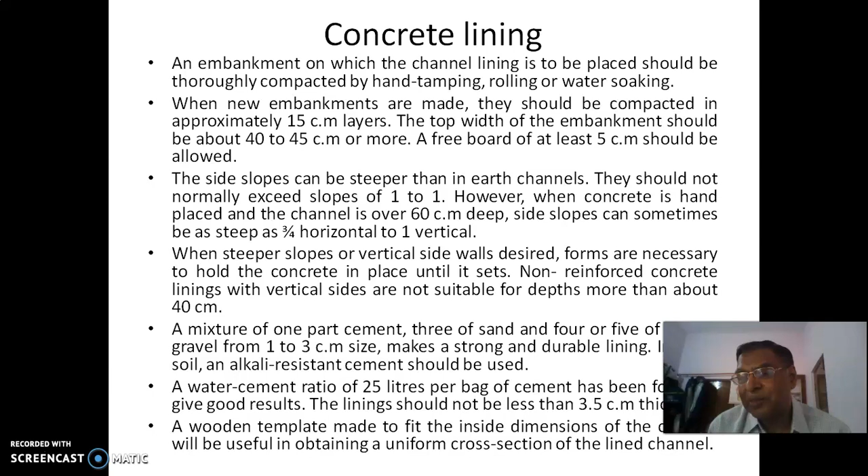Okay, next. These are very important: transverse contraction joints. Like in concrete, you leave some gaps. Normally for roofs, when you have a larger area, you leave some gaps to allow the concrete to expand and contract. Even concrete roads have grooves; there are gaps. So like that, in your field channels, transverse contraction joints are used in concrete channel linings to control transverse cracking.

Cracking results from shrinkage during volume changes caused by changes in temperature or moisture content. This concrete, particularly reinforced concrete, gets expanded and contracted. When it is wetted and when it is not wetted, the concrete expands and contracts. So to give this gap, you need joints. These are called transverse contraction joints. The spacing between transverse contraction joints to reasonably control cracking should be 2 to 3 meters.

So that means every 2 to 3 meters we might have one transverse contraction joint. That's why the lining is laid in lengths of 2 to 3 meters. If you are having precast concrete structures also, you can put them in these lengths. Contraction joints are formed by constructing a vertical groove in the top third of the concrete.

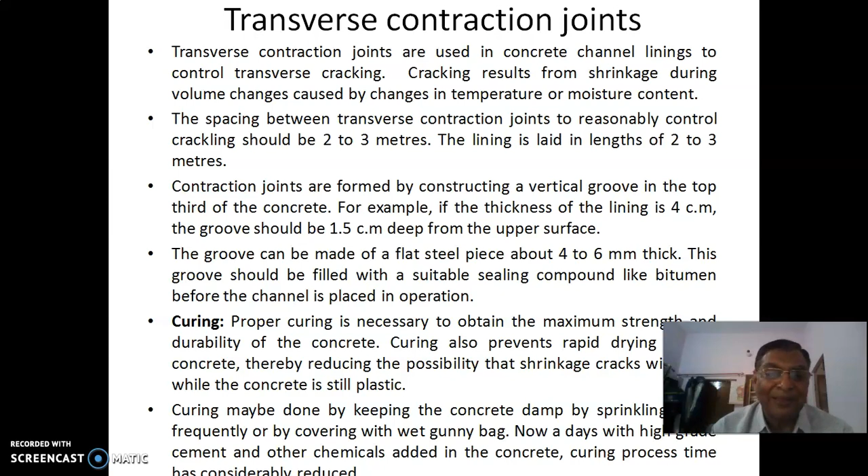Curing, this is a very important activity. Proper curing is necessary to obtain the maximum strength and durability of the concrete. Curing also prevents rapid drying of the concrete, thereby reducing the possibility that shrinkage cracks will occur while the concrete is still plastic. So if you do not have curing, you have some problems, okay. So curing prevents rapid drying of the concrete. It should slowly dry, thereby reducing the possibility of shrinkage cracks.

Curing may be done by keeping the concrete damp, by sprinkling water frequently, or by covering with wet gunny bags. So you will spread the gunny bags, and then quite often in a day, 2 or 3 times, water may be sprayed on these gunny bags. That will take care of it.

Nowadays, of course, with the high grade cements, and it seems there are some chemicals also added in the concrete, the curing process time is considerably reduced. This is one method again. Curing process time also can be considerably reduced.

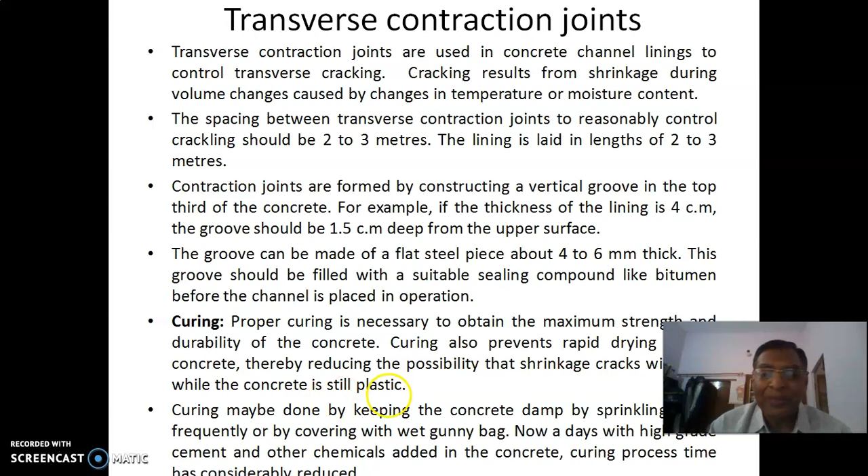Brick or stone masonry lining. Single layer brick or tile or rubble stone may be used to obtain satisfactory lining of field irrigation channels. Apart from concrete lining, as we said earlier, brick or stone masonry lining also can be done. How is it done? Single layer brick or tile or rubble stone, whatever, they are arranged, and they are simply cemented with some kind of mortar, right?

The bricks, tiles or stones are laid flat on the compacted side. Once the earthen channel is compacted, both the sides and bottom, the joints are filled with cement mortar. When you have arranged the compacted soil, over which you are placing this stone or tile or brick, you arrange it closely, and then cement it with mortar. So that is the procedure.

Whatever mortar you are preparing, you should have a cement sand ratio of 1:4. That means 1 part of cement and 4 parts of sand. The choice between brick, flat clay tile or stones depends mainly on the availability and relative costs. So suppose local stone is available, you can normally go for stone lining. If no stone is available, you can go for brick lining. Or tiles, if manufactured tiles are readily available and cheap, then you can also use them, no problem.

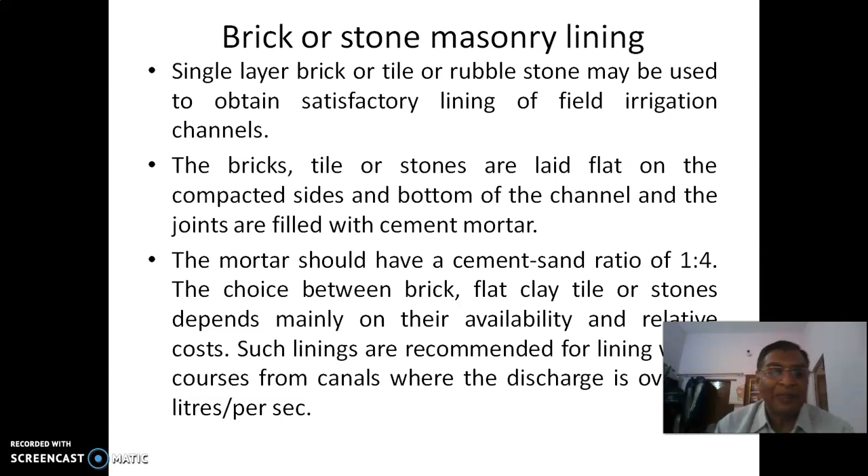Such linings are recommended for lining water courses from canals where the discharge is over 30 liters per second. Particularly where a little bit high discharge is there, definitely the lining should be there, either with concrete or brick or stone masonry. Okay, that was the brick or stone masonry lining.

Now you have precast concrete channel section. We have been talking about this. Precast concrete is a term applied to concrete units that are manufactured at a central place and hauled to the job site. Many times at a job site, it is not so easy or convenient to get concrete work done properly, because many constraints are there. But if it is done at a factory level, everything is under control.

The water supply is available, material is available, proper forms and shapes are available. You can put it as something like a factory-level grade, so that even cost can also be reduced. That's why their low cost and operating advantages make them particularly suitable for handling comparatively low discharges. Particularly for low discharges, these are very much suitable. Many of these field channels have low discharges only, not big discharges.

This cannot be done for high discharges, because the structure is very big. But nowadays even very big concrete shapes are being prepared. You can see flyovers also being built with precast concrete slabs and other things. So that is not a big issue. Precast concrete channel sections may be made in semicircular or U sections. This is a standard

The area of land occupied by the channel is greatly reduced. This is another thing. They are made in lengths of 1 meter or more, and are generally 30 to 45 centimeters in diameter. This will suffice for the field channel. The area of land occupied by them is also very less. That is why you can go for these things.

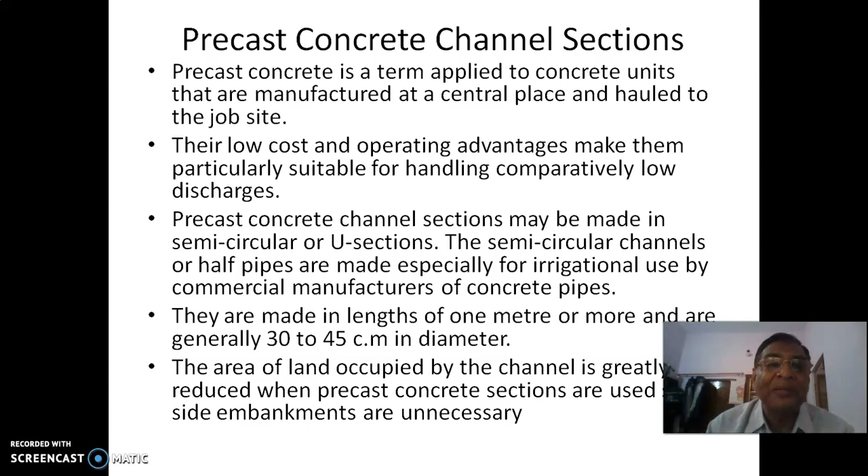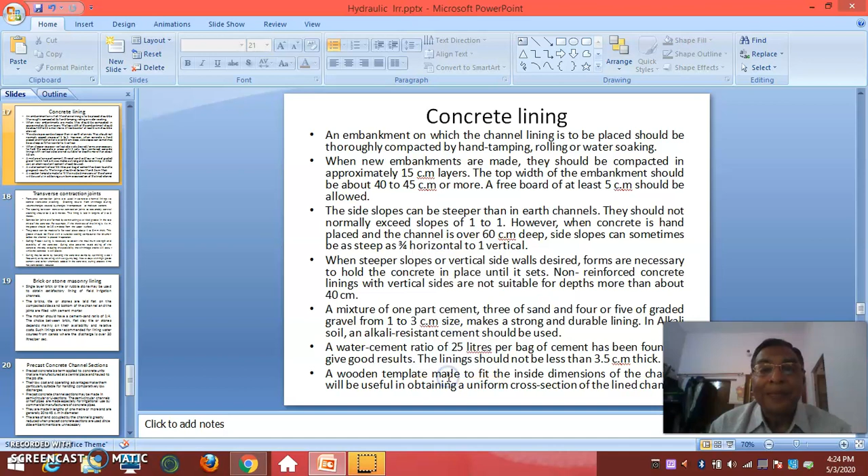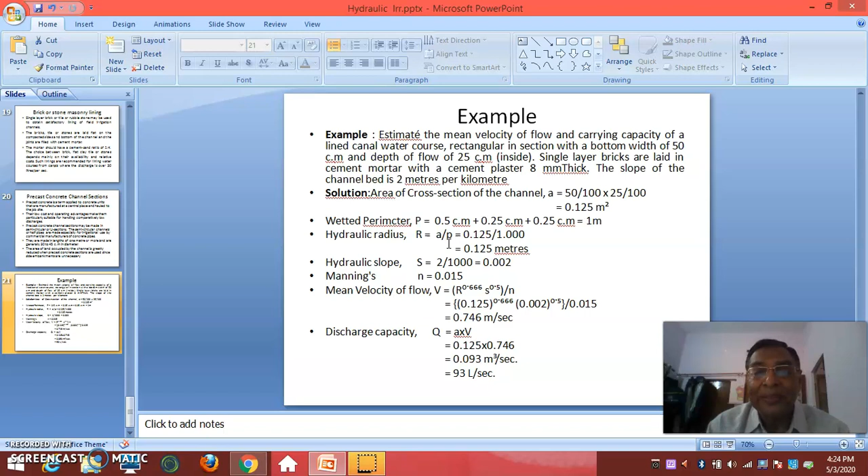A is the cross-sectional area of the channel, and because it is rectangular, you take the sides and the bottom. These are 25 centimeter sides, and then the bottom. This is the area: height into width. And then this is the perimeter. There is a mistake here. It's not 0.5 centimeters, it's 50 centimeters actually.

Then A by P gives you the hydraulic radius, then S the slope, then n. All these things are very understandable. Here is a small mistake: to get 1 meter, there is 50 centimeters, 25 centimeters and all. You will have a mean velocity of flow here, and then the discharge capacity is calculated. This is how you can compute the channel section's discharge capacity and velocity, and have a design. This completes open channel hydraulics.